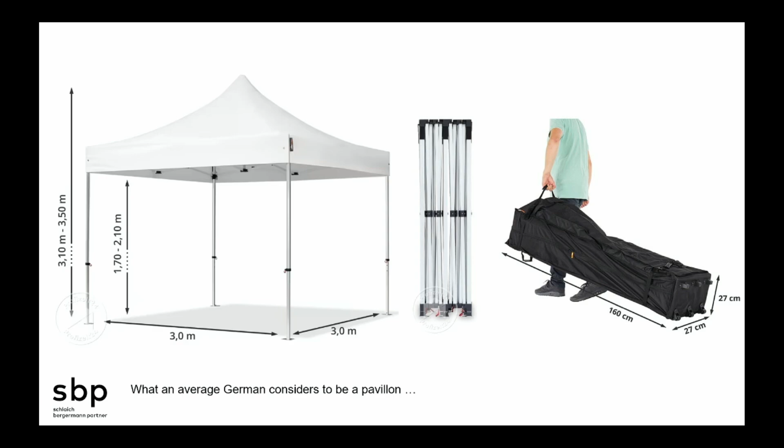And this was the question. I looked up in the internet. This is what the average German says. It's a pavilion. It's a lightweight, tensile structure which you can fold away, and which you can carry. So it's one kind of pavilion, mainly used on beer festivals and other occasions, where to celebrate and sell things. But I think this is not an adequate answer to the pavilion question.

So what can a pavilion be? I looked it up. It can be a small garden building, a summer house, a kiosk, a temporary structure. It can be built for any purpose, for leisure, for shelter. Often it's an annex to a building, sometimes it's on top of a building. It sometimes also resembles a classical temple, but not necessarily. In many cases, it's very small or tiny compared to the surrounding, and sometimes it's also embedded in the landscape, part of a pool area or whatever. So what I learned from this is nearly everything can be called a pavilion, and so it was not too hard to find some pavilions in our work as well.

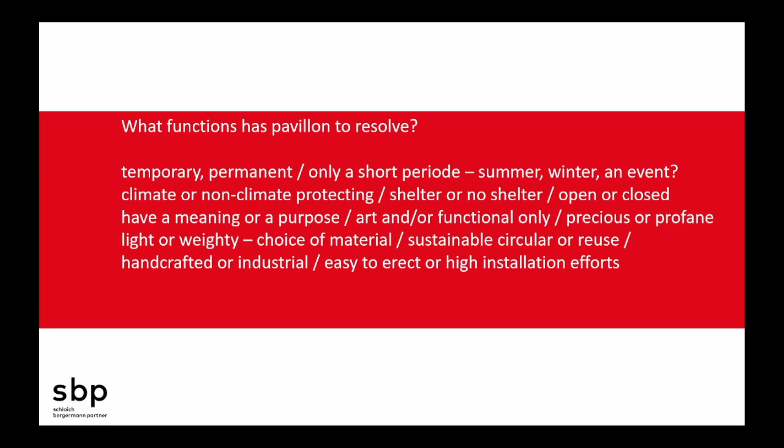So what are the functions of a pavilion? I was asking myself a little bit. It's always the question, as we have seen at the very beginning, is it something very temporary? I use it only for one occasion, for a short period? Do I have to use it in summer, winter, or which climate we have? Do we have to have climate protection in such a pavilion or not? Might it be open or closed, or is it no shelter at all? It's also only something you can walk on. And how does it deal with the landscape itself, which is natural surrounding?

Does it interfere a lot? Is it sustainable? Is it built from sustainable materials? Normally when you can reuse something or often use something, it's sustainable in itself, but also is there something in material? Are they done in a very proper handcrafted way, in an industrial way, or are they done more freestyle? That was quite interesting to find out for me.

And so also the erection, the installation, the detailing is quite nice, what normally engineers really like to talk about. And these are the things I had the feeling I should collect some ideas. But first, I had a look also to the internet. So when you want to get inspiration, I think you at AAC, which are now in the workshop, you need to look for inspiration. And in Germany, there's a big tradition on garden exhibitions. And these garden exhibitions normally display a lot of small and tiny buildings. So the garden exhibitions are a huge fundus to get ideas of pavilions.

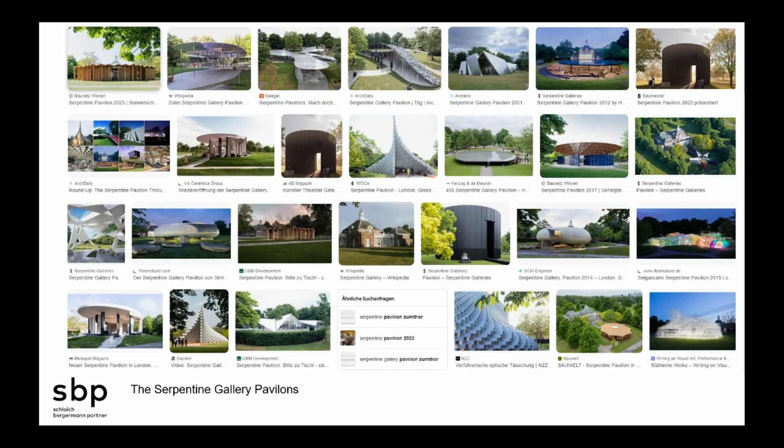And there are many people who know the Serpentine movement. Each year there is a new and nice pavilion, and these are the high-level pavilions which you can find in architecture. Always well-known architects are doing a pavilion each year. This is, I think, the top level where you can get inspiration, because I think there's no lack of money in these pavilions. But what I feel is more interesting is also to look into research.

There's Philippe Block with Block Research Group at ETH Zurich. He does a lot of research in materials, but he applies these materials in smaller pavilions. So the expression of his research is always put to a pavilion. So he rethinks shells, he rethinks concrete slabs, he works with timber and carbon. So this is a kind of inspiration.

But also in Stuttgart, there's Achim Menges and also Jan Knippers, who are working at the University of Stuttgart. And they are working with timber. They are also working with carbon fiber systems. You could say carbon fiber, wow, that's a nice material for tension. They mainly use it as compression member, which I don't really like, but they're doing nice examples. And also the production and the fabrication of these elements is very nicely done, so that we can learn a lot. This is what you can find everywhere you look.

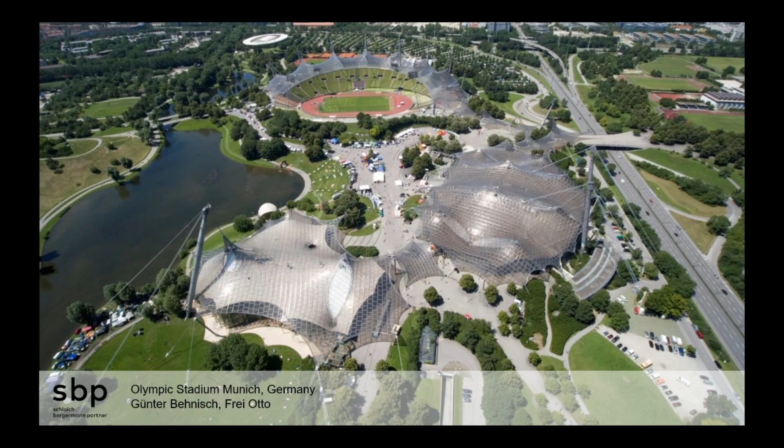So the kind of mother of development in our office of lightweight architecture is the Olympic Stadium in Munich, the tent by Günter Behnisch, which was inspired there by Frei Otto, and Jörg Schlaich and Rudolf Bergermann, who are the founders of the office, worked as the lead engineers in that project. And I would say you could call this a pavilion in a garden as well, because it's a lightweight roof covering a landscape.

So even if it's, and this is the reason why I said it must not be small, for me this is one of the examples of a huge pavilion embedded in a nice landscape. And this is something where I said, okay, there must be more of them.

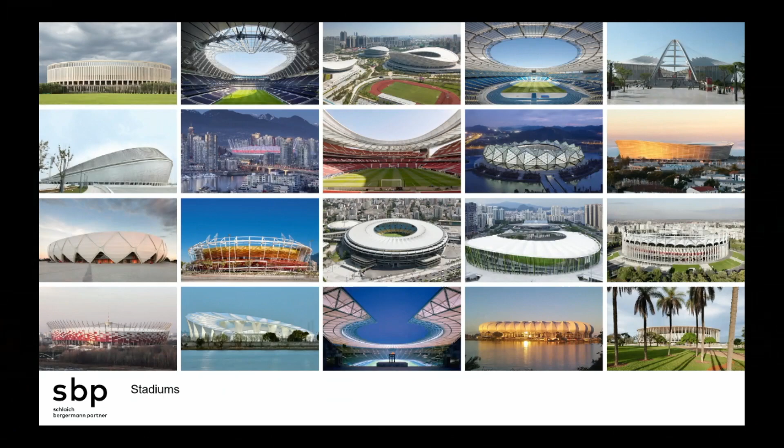So on these kind of structures like stadia, we work worldwide. A lot of projects are together with von Gerkan Marg and Partner. I always take one example of one section. This is Suzhou, which I did with Nico and Magdalene. And also here you can see there are smaller buildings resting on a plinth. Also this can be called maybe a pavilion, but these are sports buildings.

The main interesting thing with us as engineers in this project was, normally we do tensile structures, and there's a very famous principle of the ring cable roof, which we apply to many stadiums worldwide. And then we had this nice undulated shape of the Suzhou roofs, and can we make structural use of that?

And this ended up in a single layered roof, and this is a kind of expression, I think we used this picture during competition, where we explained to the clients, okay, there's a transition from a double layer cable system to a single layer cable system. And this was the challenge at that project, which we had to work on. And in each and every project, we would try to find a new challenge. That's how we like to work.

We do a lot of roof structures, glass, membrane, whatever roof structures. So they're also spread out worldwide. One example is also Suzhou, because it's one of the biggest grid shell roofs in the world. It was done together with Benoy Architects. It's covering more than 35,000 square meters. It's resting on 4 buildings, and it's one single roof wrapping everything together.

But the main interesting thing with these grid shells, which have a long tradition and a long history, which can be found also in Hamburg, the Hamburg Museum, is how to mesh such a roof, how to handle deformations, how to handle, in China especially, the vibrations or the dynamics which derive from the earthquake.

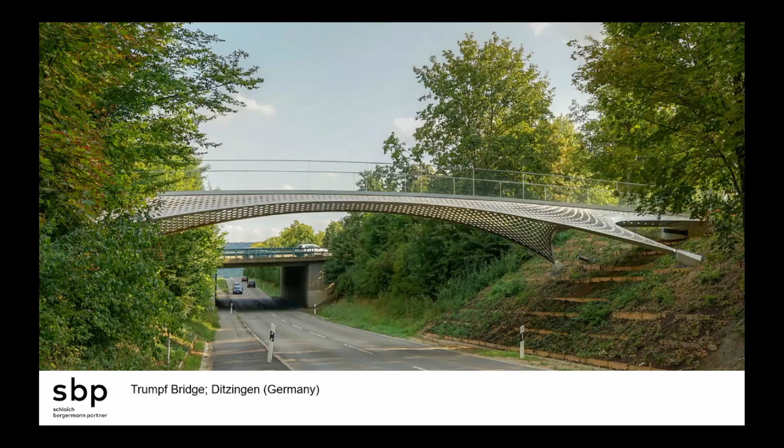We do a lot of footbridges. I have one example. That's a bridge for Trumpf in Stuttgart. It's not a small company, it's a very famous company doing laser technology. And the idea comes from an orange net, which you stretch across an arch. Then you have a tensile structure.

This one is stretched, and when you would freeze that, the word freeze I will come to later on again, you can remove all these stabilizing things, and you have a compression structure. Now it's a tension structure. At the end, it's a compression structure. And also here you can see the white fibers of the net are following the line of the forces. And so you can ideally learn from such a simple model how a structure could work.

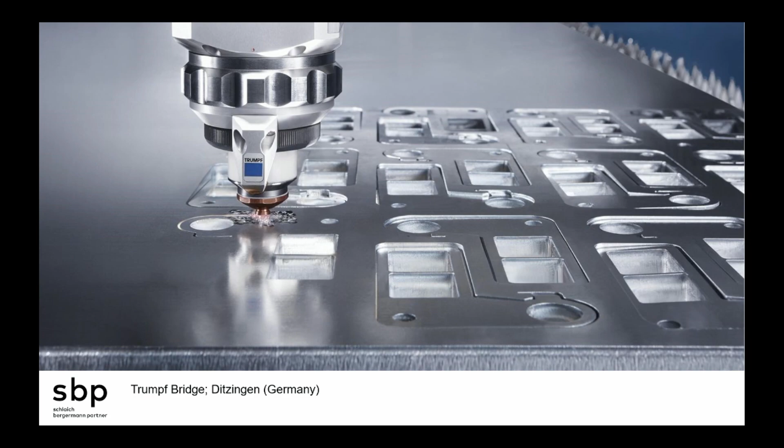And the fun was that Trumpf, as they do laser cutting, well received the idea that the material which is not needed in the structure, following the lines of the forces, we cut away by laser cutting. And this was done in a huge workshop.

And as you can see, it's like the cable net you have seen before. The lines are stretching out where there's no material needed. We cut it away. And the other material parts where there's force and density needed, they are still in place. That's from structural idea to fabrication. This was the idea behind the bridge, what we were interested in.

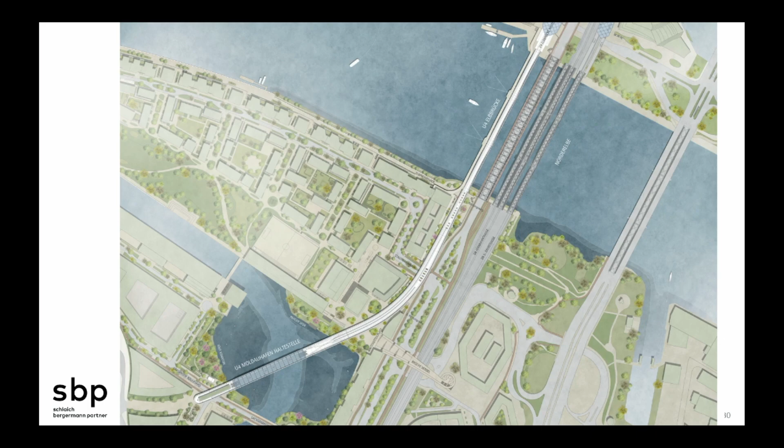We do a lot of big scale bridges, roads, railroads. I brought one example, which is actually the biggest one in Hamburg. We are really proud to do it together with GMP and also with WTM, which are engineers from Hamburg.

That's a crossing of the Elbe, U4. And the very special thing here is there are the historic bridges of Freihafen-Elbbrücke, which are very famous, which are very important to the city of Hamburg. And in front of them, we add a new arch system. And this new arch system is half the height of the old arches, because we apply new technologies and new

materials. The hangers, which are here in the back at the Freihafen-Elbbrücke, you see everything from steel. They're nearly invisible in our new bridges because they're made from carbon, because carbon can take high tension forces. And this allows us to crisscross the cables and to build this not as an arch only, it's a truss as well. And this allows us to bring down the curvature.

And so the explanation was, it's like an onion. You put a next layer of technology, a next layer of development in front of the old bridges. And I think this story was quite nice to explain to the jury, and the jury found it very, very interesting to have these bridges in Hamburg.

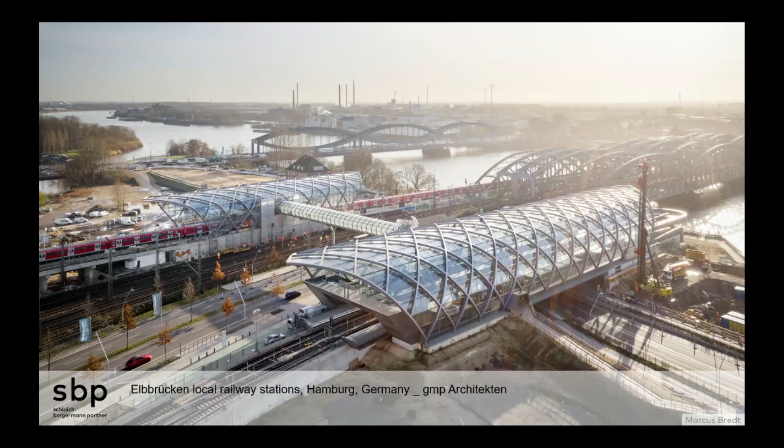There's infrastructure more than this. Also with von Gerkan, Marg and Partners, that's the starting point of these bridges. It's Elbbrücken Haltestelle, so it's a stop of Elbbrücken S- and U-Bahn. And the very remarkable thing is that within the old environment of the steel structure, we found an expression to have a new roof expressing the same kind of thinking, steel as the exposed material, showing how the structure will work. And the tricky thing with this was how to develop the geometry again.

So the geometry of these girders, which are going across the barrel, are kind of curved. And to resolve such geometrical problems, that's something of huge interest to us. So that's from inside. Inside it's smooth because the steel structure, as we can see it from the Freihafen-Elbbrücke, is outside. It's very well visible, but the inner skin is very slick because the glass layer is inside.

We do a lot of long span structures, which we call halls. Many of them are fair and exhibition grounds. So this is something we did, I would say, worldwide at 20, 25, 30 locations together with the colleagues sitting here. And with each of these projects you could say, okay, it's getting boring. No, it's not getting boring because there are always specialities.

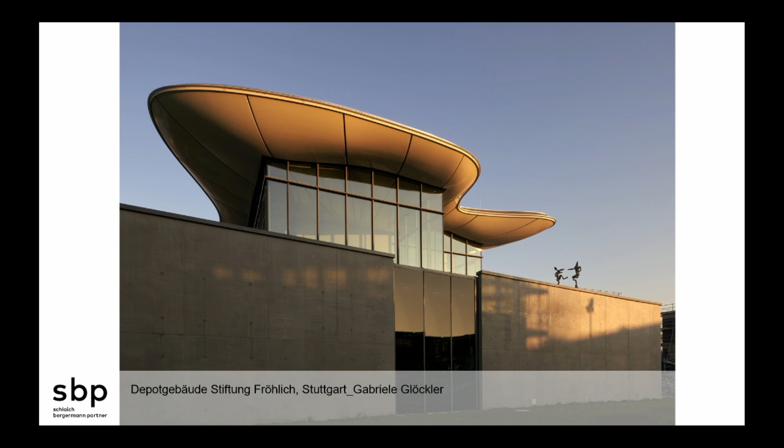We're doing cultural buildings a lot. This is a very, very small example of a museum in Stuttgart. There's a collector, Mr. Fröhlich, and he collects pictures, and he built a depot. That's just a depot. The concrete thing is the most important. What is resting on top, this little pavilion, is just a meeting room for his company, which is located next to it.

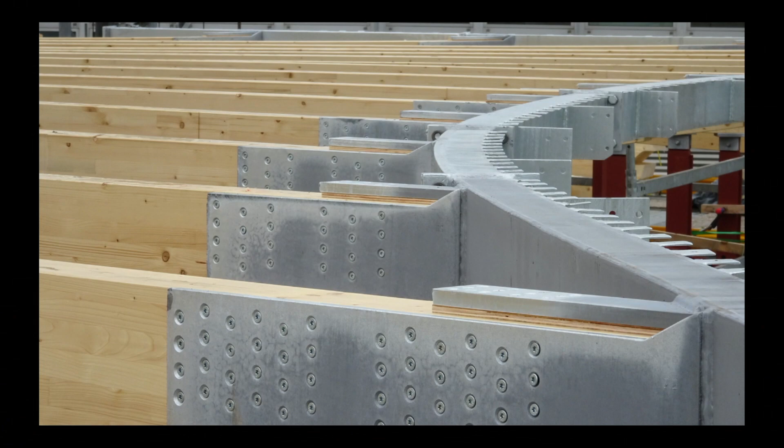The idea was how, and this is what I also like when I work with architects, is sketching. I feel it is very important to sketch and express yourself in the form of a sketch. Today it could also be an electronic or a different kind of drawing. But my expression is sketches, and when you have colleagues where you can sketch together and find out how you can resolve such a curved structure, that's the fun I like, that's the fun I'm attracted by. And the shape is maybe curved, but you have to bring this into a solution which can be solved by the industry.

And these days, when you have curved structures, you mainly combine steel and timber, because the timber you can machine very properly to any shape you want, and this gives you freedom to develop forms. And the steel is in most cases needed. You will see this later on in some more detailed examples, because the timber has its weakness.

And we are used to long spans, we are used to high forces, and we always think what we can solve with steel, we also can solve with timber, and that's not true. So we have to also do the construction or select the materials or react with our construction, with our spans, with our systems on the material we want to use. That's also an important message.

And that is what is inside here. That's a collection, or a part of it, it's only one wall, they have several walls. So this was the nice thing, to have such a nice concrete block and have wonderful pictures inside. I guess you know what all these pictures are. And then there are the large scale projects.

This is the Opera in Shanghai together with Snohetta, where we developed the entire geometry, which derives from a fan, which you would need to cool down a little bit here. And this is a big stair winding up with a cantilever of, let's say, 25 to 27 meters. And this is kind of winding up.

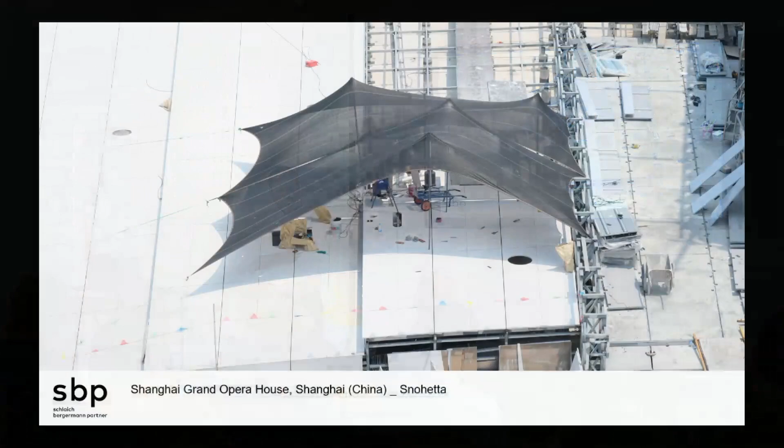And this is what the workers put up for sun shade on the stairs, and I would call this a wonderful pavilion, but this is only a sunshade for the one doing some welding works. But for me this is a pavilion.

We do a lot of art installations together with different artists, I have some with me, or with architects. A simple one, this was in Beijing. It's just a metal plate where you cut lines and then you punch a mast through, and this gives this so-called spiky canopy. With Hou de Sousa from New York, we did some walkable structures, very simple, but from these things you can also learn how to treat color, how to treat minimal, very tiny details and so on. It's also very nice.

Or we work as a university. One of my partners, Mike Schlaich, is professor at the Technical University of Berlin. And there was a huge development, it's called the Great Repair, where we think, I think this is one of the challenges in the next years, that buildings have to be retrofitted or upgraded. And this kind of symposium was about how we can make buildings which are already existing function again for more than the next 50 years.

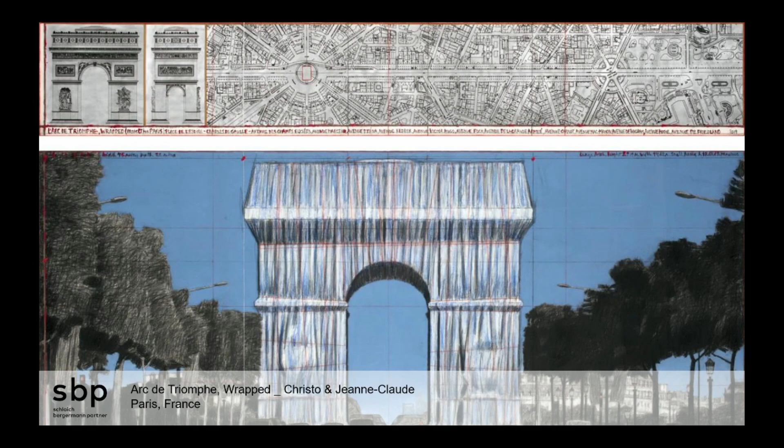And we had the great pleasure to work with Christo and Jeanne-Claude. The latest project we worked on was the Arc de Triomphe. We did all the wrapping of the arc, so all the structural engineering, and you would really wonder how much structural engineering is in such a little package. We could not drill any hole into the arc.

We could not fix anything, so everything was bound around, was stretched, was kind of hung from the top, and finally all the lines which you see here, where the cables or the ropes are running along, they are given by the artist and have to be followed very precisely. So to solve this took us 1.5 years, in order not to harm the building, which is under heritage protection. But it's huge fun, and it's a huge pleasure to do such things.

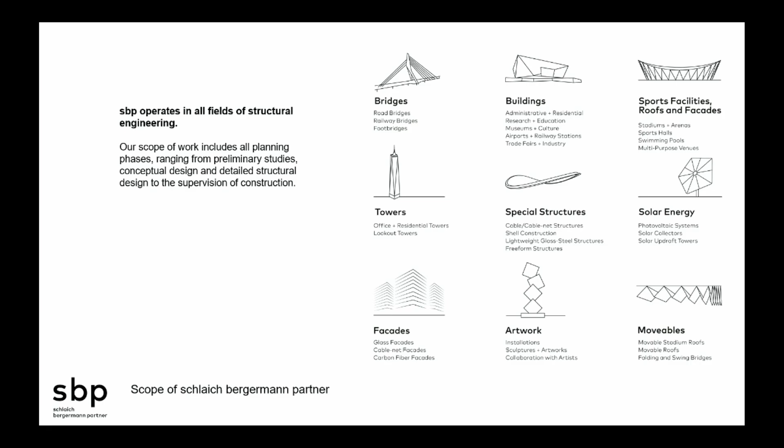So you see, you can look to every field, you find a lot of buildings. And I try to give a bit more detailed insight into more projects. I question myself, what is the importance in a pavilion: design expression, or is it structural logic? Must it be heavy or must it be light? Thin or massive? Can it be concrete, clay, brick, whatever? And you will see at the end, when my conclusion is given, what I think about that.

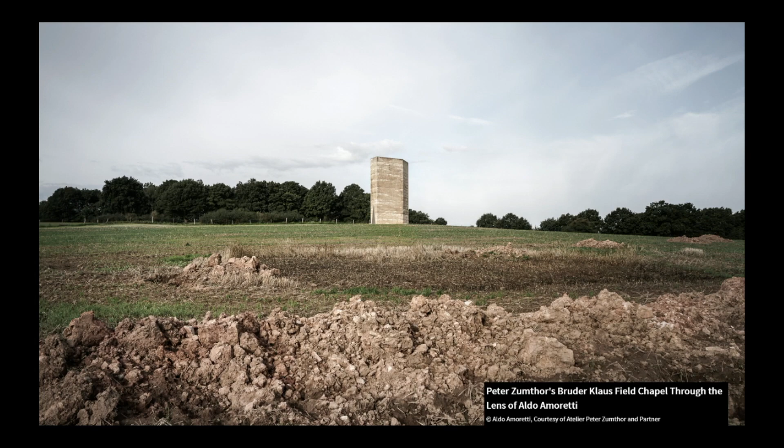And we are more speaking about lightweight. We're coming from the other side, not from heavy concrete, but from lightweight structure. Mike Schlaich at the University in Berlin developed this infralight concrete, which is lighter than water, which swims in water. We developed several buildings from this concrete, which uses clay bubbles inside to make it very light.

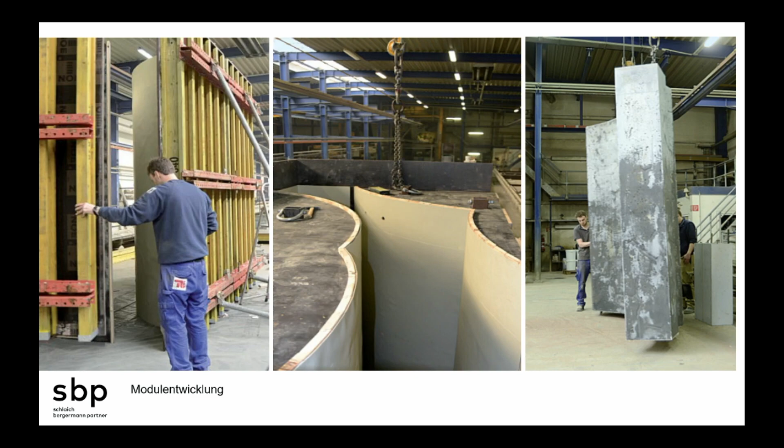This is also a kindergarten in Berlin. It looks like it could be a pavilion or could be used as one. This is cast in place, but because it's so light, you could also do prefabricated elements. If I were talking about a pavilion which should be heavy, I would go for something prefabricated, which you can easily assemble on site and move. When you want a heavy material or heavy-looking material, it could be concrete, but it could also be a light concrete to help fulfill this task.

This is a pavilion or proposal for IBA together with Barkow Leibinger, made from these single elements. It's like ein Kartenhaus, so it's just simple plates with a plate on top. That's a pavilion from concrete.

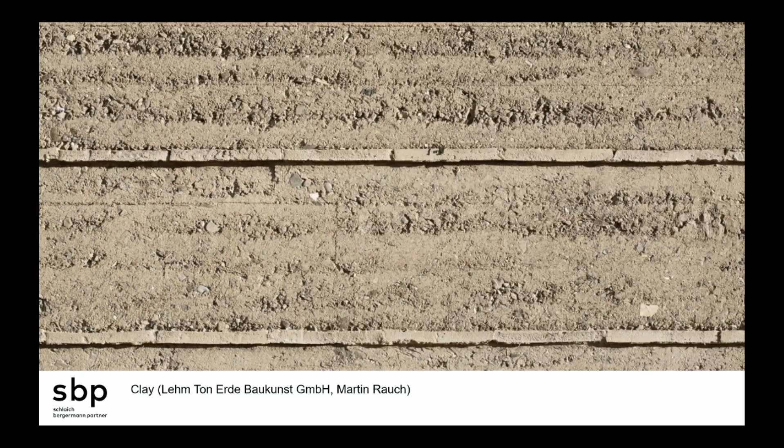There's clay as a material, and there's a very famous guy, Martin Rauch, in Vorarlberg, where I do my vacations next to. It's called Lehm, Ton, Erde, Baukunst, so they're doing a lot of clay buildings. And these clay buildings, you would not expect that.

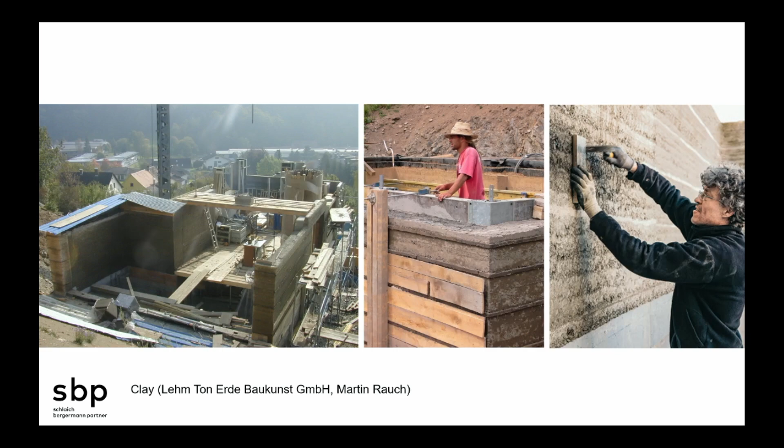The idea behind it from Martin Rauch is normally to take the material from the site you're building and build up your buildings. This is his private house in Schlins, and it's handcrafted, everything is handcrafted. It's good, someone might wonder, that's tricky, always handcrafted. But now they've erected a new fabrication facility, and they do prefabricated elements which you can transport. Actually, many buildings in Germany are built up from these prefabricated clay elements. As a student, you can do an internship at Martin Rauch's workshops, or a summer school. Also something very nice you can do in Vorarlberg besides hiking and everything else.

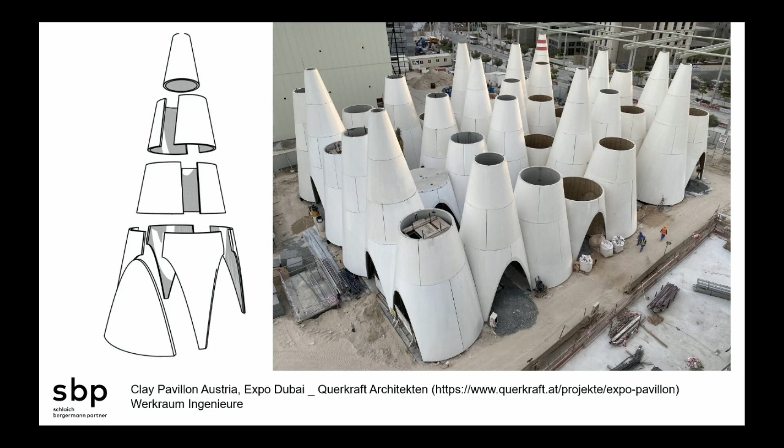Clay is quite nice. There's a nice example from Querkraft Architekten for the Expo in Dubai. As you can see, these are huge cones, and these cones are also from a clay structure, but they are also prefabricated. That's the important thing behind it, because within a short period—our reality in the building industry is this: you don't have 4 years for doing a building. The periods for doing a construction get shorter and shorter. So the solution could only be prefabricated, repetitive elements. Repetitive is also very important in that context.

And this is what they did for this pavilion. The engineers were Werkraum Ingenieure from Austria.

Clay. There's a colleague of Philippe Block at the ETH, and the next step could also be using robots and prefabricated clay cylinders to put together a form. It was fun for me to look into that because I know about Gramazio Kohler, and they do these same shapes with clay, prefabricated clay elements which are laid like bricks by a robot.

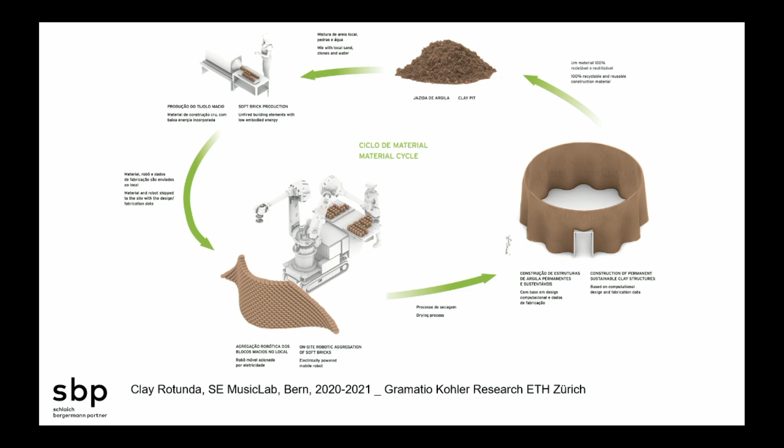So in the ideas behind clay, it's always that you have a building, and this building can go—it can disappear back into nature again. That's the nice idea behind clay, which I think for a pavilion in a landscape could also be a solution.

I normally say heavy, light, hard, and so on. We are more on the lighter side of the structures.

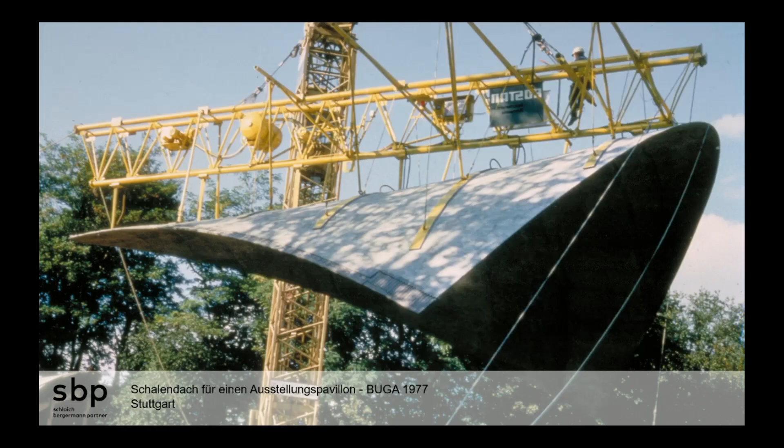This is a very old example of Jörg Schlaich, the pavilion for Buga 1977. It's a shell structure with a thickness of about 1.5 centimeters, a bit more at the end. It's built from repetitive elements, built on one scaffolding, so you can make hundreds of them, which is very useful.

They are built from fiber-reinforced concrete in 1977 — that's what we're talking about these days a lot, and really not managing to do new buildings. This structure rests on little steel balls, so it's extremely light and extremely thought through from the structural flow of forces. Nothing interferes with the flow of forces, so it's really a natural form of force. The foundations are also prefabricated.

This is this famous detail we learned as students, and used it a lot throughout all our work on bridges, everywhere, even for fair and exhibition halls — we use these ball joints. And this you can also do with brickwork.

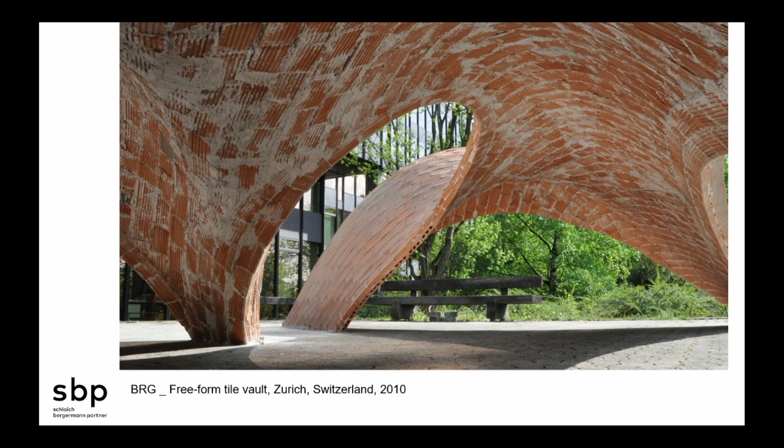That's again Block Research Group. It's also a natural shape, built up from smaller elements, also prefabricated. But what you need here is to bring the single elements in line with the forces and fill the gaps, and you need a formwork — this is the effort behind it. Whereas in the Stuttgart shell there's one formwork and you bring these elements on site and build them together, here you need a full formwork of the entire structure.

All of these, including the Stuttgart shell of '77, have predecessors. One of the famous predecessors of all these shell structures is Felix Candela, and the Xochimilco shell from '58 has a thickness of, let's say, 7 to 8 centimeters. It's cast in place.

It was kind of the example for the Stuttgart shell, and even colleagues of younger age, like Santiago Calatrava, used it for Valencia. So what I want to remind you is, don't only look back 5 or 10 years — sometimes you have to look back 20, 50 years. There have been good ideas, and it's like the wheel of fortune: everything repeats. When you properly look back, you find things that could inspire you, and when you refresh them with new technologies and new ideas, I think this is worth mentioning.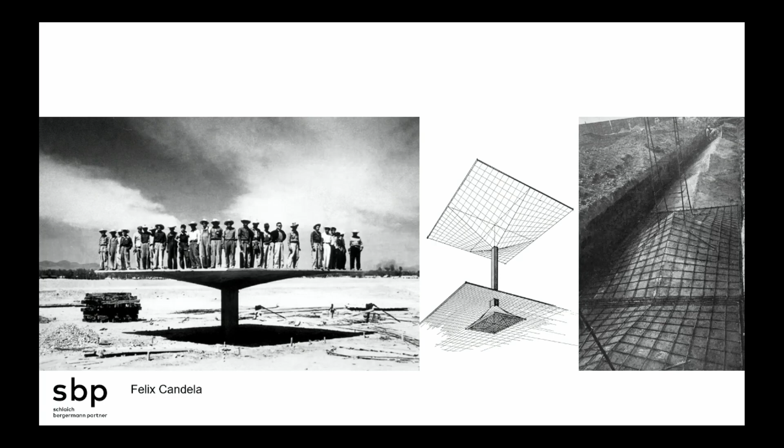Felix Candela we like very much as structural engineers. He did very simple buildings — that's a lightweight roof. But the clever thing is he did the foundation also as a shell, the same shell you see on top. Normally we use 2 by 2 by 1 meter concrete blocks; he only used a 10 centimeter shell as a foundation, doing the same work as a traditional, not well thought-out foundation of these days. This is the reason why looking back could be helpful and a way to learn.

Heinz Isler is another one doing these lightweight structures. This is a stop at an autobahn motorway. For me, it's one of the nicest pavilions you can find among shell structures, and I liked it from the very beginning when I did my studies in structural engineering. He did many industrial buildings, also with repetitive shells.

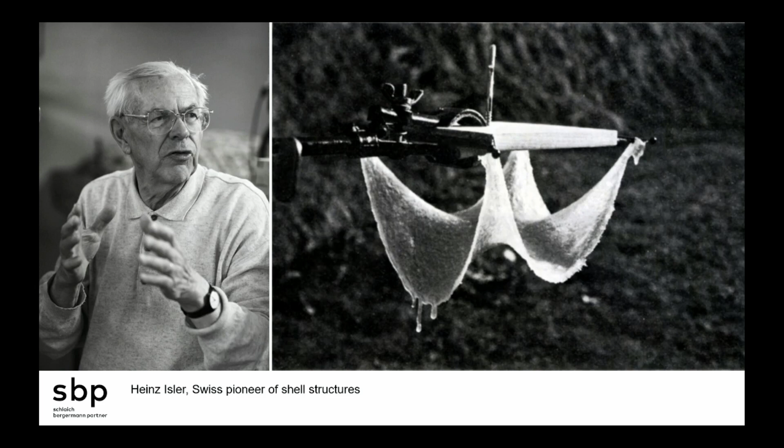That's Heinz Isler, and what impressed me a lot is the idea of form finding, because he's from Switzerland and sometimes it's really cold there. So he just hung some fabric, sprayed it with water, and then flipped it around — the same as with the bridge I showed you before, going from tension into compression. That's a play structural engineers like to talk about.

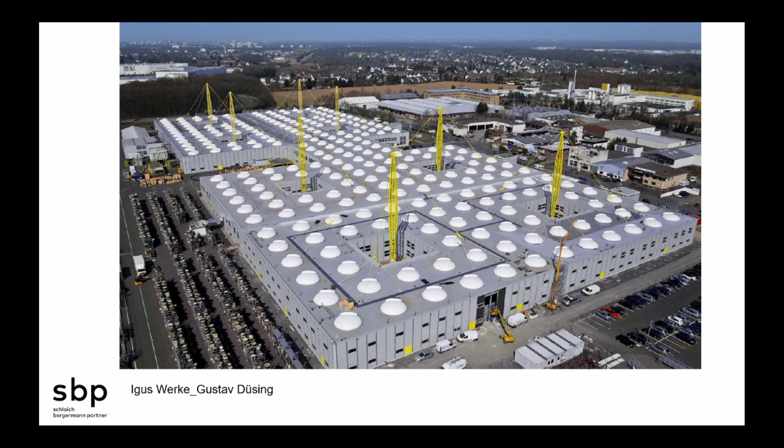It's also not very new — that's Gustav Düsing, who I'd say is one of the very famous young architects in Germany actually. What he does with his frozen tent somehow binds back, for me, to Isler. Gustav was working with us together on Igus Werke, a very famous building for all architects of a certain age. They have courtyards where they take their breaks, which were developed as gardens, and he likes this lightweight fabric architecture.

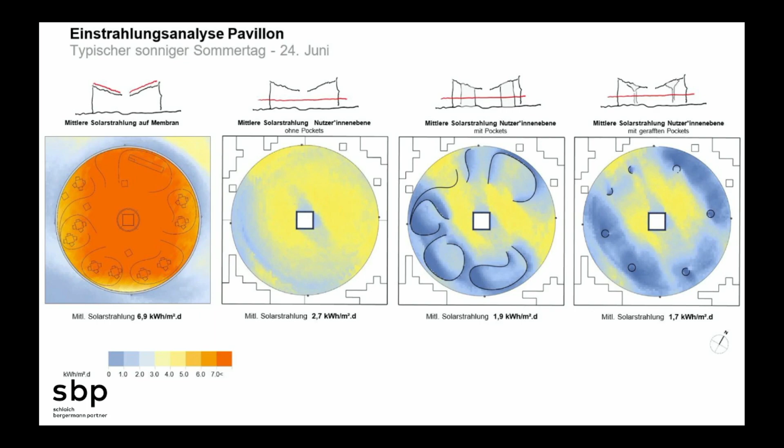We developed together with him a ring system that could be clad with a fabric, and from this ring different kinds of curtains are hanging. This is more an outdoor space, an outdoor pavilion with natural cooling and natural ventilation. The curtains are freely hung from the roof, and with some magnets you could fix them to the ground, so you can create walls. This is the thinking of a lightweight pavilion made from fabric.

They are not load bearing. The other ones, which are frozen, are load bearing, but fabric can be used in different ways. I have a few examples dealing with steel, aluminum, and timber. The question is, do they always have to be three-dimensional? Or are they linear? Are they perfect? Are they imperfect? Are they prefab or made on site?

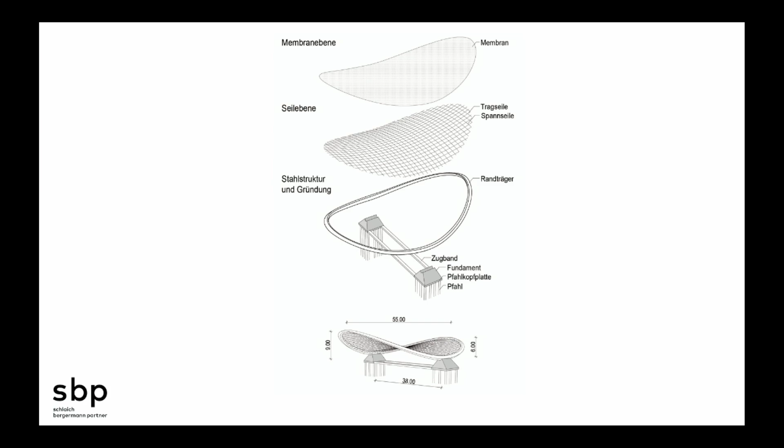So simple, placing a Pringle on the ground. You need a little bit of foundation, but this is a simple element. If you think smaller, you could bring it prefabricated and set it on the ground, laid against each other. That's also useful - there's also a bigger pavilion, from Porsche in Wolfsburg, Autostadt.

Very, very advanced technology - it's a shipbuilding system. Inside you have a structure which gives the shape, and then you have a cladding, like the skin of a ship, made from curved stainless steel. This is the very perfect version of a steel structure. When you look at steel, they need more effort in workshops, more effort in machining. That's the disadvantage or the advantage of steel - you can create more perfect systems. So all these elements are bent in the workshop, and then put together to house the cars.

A very simple pavilion we did for Baselworld, a fair and exhibition ground normally displaying watches, handbags, very luxury things. They're not too happy when there's a non-perfect structure, so they asked for a very perfect structure. This follows something we, as architects at GMP, and we as structural engineers, are always working on - a folded plate principle, which is quite nice, giving three-dimensional shape to simple blocks. These you can dissolve into triangles.

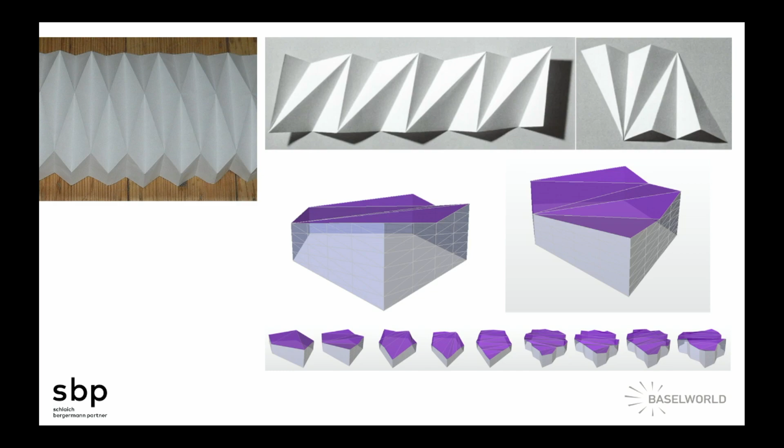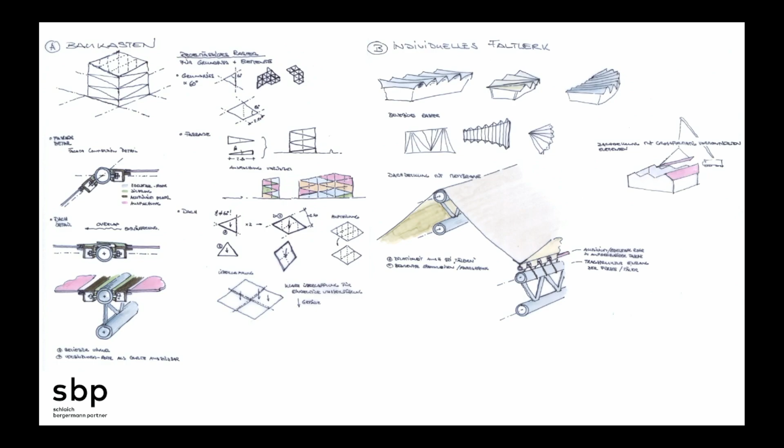These triangles you can elaborate into a set of elements, which are then repetitive - you assemble them, and you can dismantle and reassemble as a pavilion. The most important thing when you think about such a system, which you want to assemble and dismantle again, is how the details are made - there's very early thinking needed on how to handle the detail. The material here is aluminum, because it's light, so people can carry it.

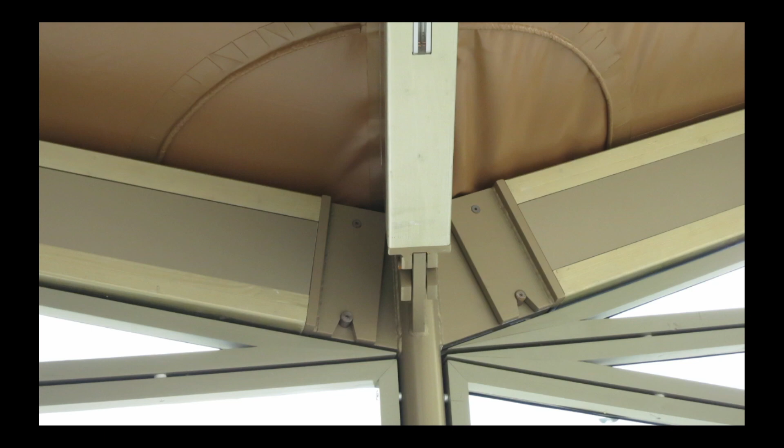Everything has to be machined in a very precise way, Swiss-way machining. Finally, all the detailing you've seen in the sketch has to be developed from the sketch into the drawings, into the machining, and this is the final result. This working - how you hang things together, how you bind things - is the tricky part when you work on these pavilions with linear elements. That's how it looks. The roof cladding is fabric again, which can easily follow that folding.

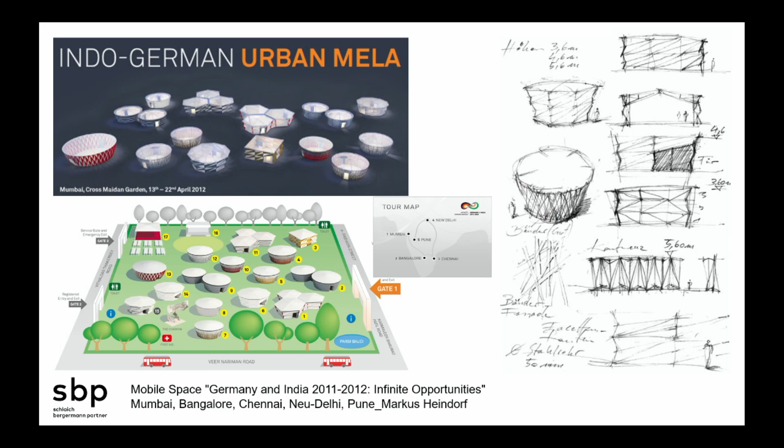Same principle, much more simple - this is Markus Heinsdorf, an artist, and we did mobile spaces together with him. These pavilions were used to display German industry in India at several locations: Mumbai, Bangalore, Chennai, New Delhi, Pune - a lot of places to display. All these pavilions had to be mounted and dismounted several times, and had to be light. This is how it looked, and we have different pavilions developed from very simple tubular sections, with standardized lengths.

They have standardized node points. When the spans get wider, there were sometimes cable suspensions, and also the outer skin was kind of folded, triangularly folded, because the triangle is always giving the stability to a structure. It's not parallel, it's the triangle that gives the stability. And then they were clad by different fabric materials to give the variety of shape, of looks.

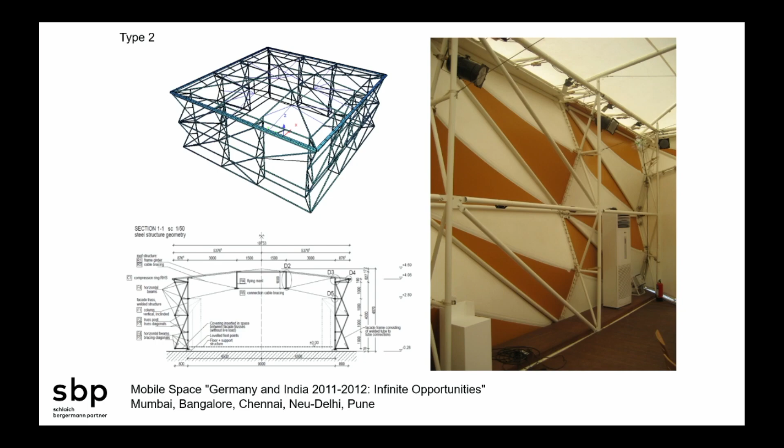So there were round, edgy, combined ones, and they were built up from more or less the same elements, like a set of members. Yeah? And this set of members you could reassemble in infinite opportunities in order to create different kinds of locations.

And also, what is important when you assemble things several times is that parts are easy to erect, that they are not too heavy, and you can have workers from the city where you're doing the erection. So they must not be very much trained. So untrained workers can do this assembly work with this system.

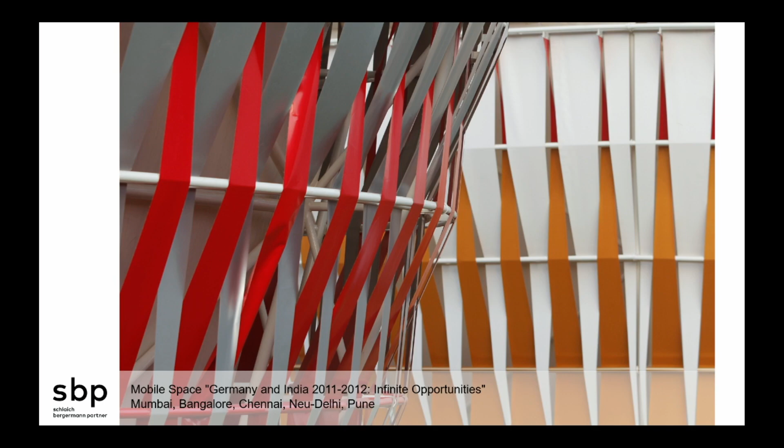And this is just a picture of how Markus Heinsdorf handled the variation. It's just some fabric stripes in some colors, which ends up with some light in a, I would say, beautiful India-like picture. Yeah? Because this colorful image, people liked a lot in India.

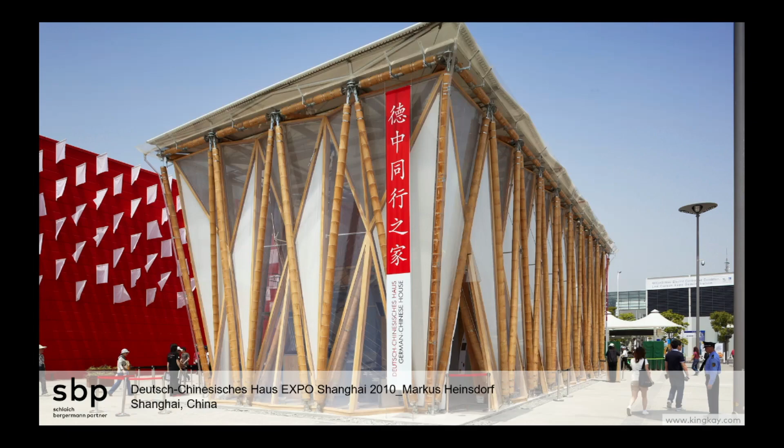This is Markus Heinsdorf, and he also did the Expo Pavilion Deutsch-Chinesisches Haus in Shanghai. And at the end, it's the same principle behind that, but a different material. He normally uses a lot of bamboo, and here he used bamboo as well. That's the picture of Deutsch-Chinesisches Haus, and as you can see, it's quite the same. Single elements, node point, repetitive detailing, which you can bolt together very easily.

Then there's a facade which is independent from the structure, which was lying in the back, and an independent roof structure, which is resting on the structure. So this was the build-up. There was an inner platform also from timber, an outer structure, and that's the main point. And everywhere you can see the triangles for the stabilization. And there's an inner framework, which is kind of wrapped by the glass or by the fabric. That's from the side. Quite easy build-up structure.

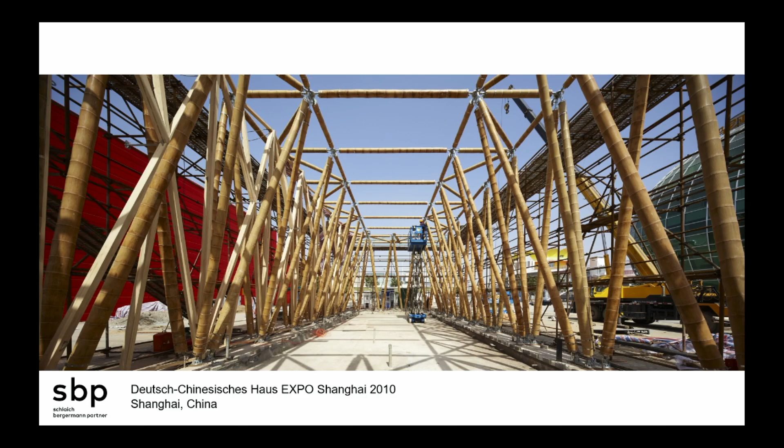Very simple, but also the detailing is very tricky. Bamboo, you know, it's a tube. Not each and every bamboo grain is the same. So you have to look at each of them. You have to machine them. You have to adjust the lengths. Everything you insert, it's hard to fix. So there were slots cut, things put in, and there were kind of rings wrapped around to stretch them.

And all the detailing has to be done in proper steel work. So that's the tricky thing, how to connect, because timber always needs steel for the connections. And here it was done by inserting a steel part and then wrapping and stressing these ribbons on the outside. So all the details can be adjusted on site, because none of the members has the same length, because they're natural. And so it's quite a nice pavilion, but with a lot of effort.

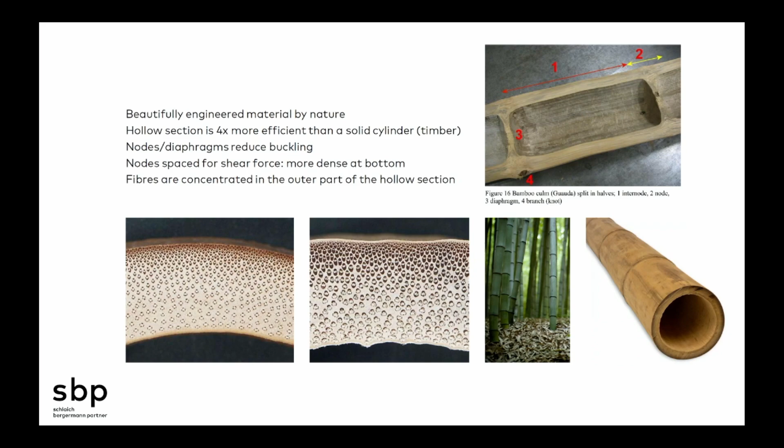And one thing I want to mention is bamboo is a really wonderful material, because it's structurally really nicely built up as a tube, and it has also these node points with the diaphragm, which stabilize the tube so that the outer tube can be very thin. It's still a natural material, but it has a really high strength. It's 4 times that of the boreal timbers we have here, and it's growing very, very fast. So that's also an advantage in making use of it.

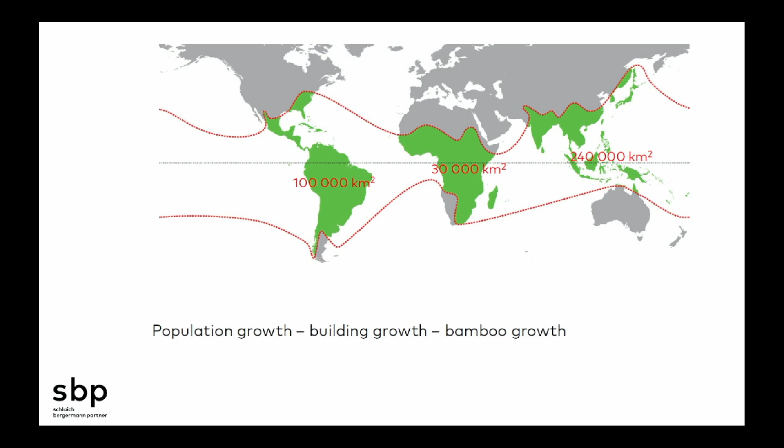But also the treatment of the timber, when you don't want to see these knuckles and all these things, needs a lot of craftsmanship. And what we have to say as well, there's a certain area where bamboo is growing, and it absolutely makes no sense to transport bamboo around the world, for example, to Germany. As well, it makes no sense to transport timber from Canada or from Europe to China. So the message should be: use materials which are from the location, which are growing there, or which are traditional there.

For example, when you want to make solid beams from bamboo, which they also do, you have to split all these bamboo elements into small slats and glue them together, or you even use a bamboo fiber, because otherwise you don't achieve the kind of shapes we are used to.

And Markus Heinsdorf, he used the bamboo as it is. But a construction industry would like to use it this way, and this is a lot of effort. And I think this effort makes sense in countries where bamboo is growing. This is the area where we have the boreal forests, where the timber we are using is coming from. And so everything in the northern hemisphere, I would say, should mainly not use bamboo for construction elements.

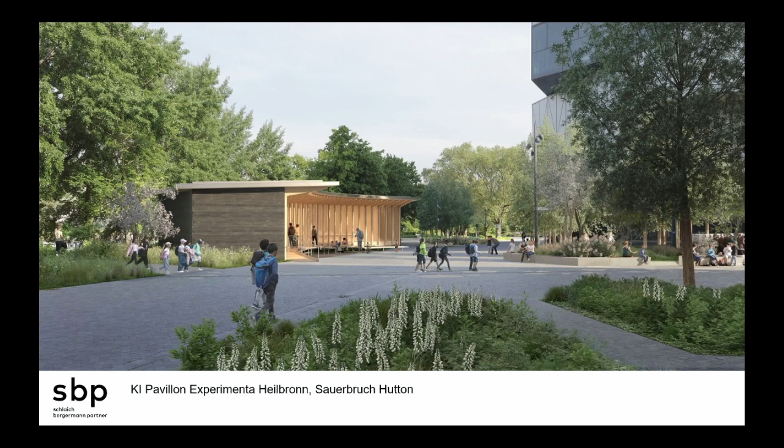This is a pavilion in Heilbronn, a smaller one with Sauerbruch-Hutton, full timber structure following these principles, only plates. So the idea was having a very simple pavilion, but there were some problems on site. There's a kind of a plaza. They wanted to orientate it, so it was bent. Then there were nice lookouts, there's a river in the back. They wanted to have nice lookouts, so they cut away some of the elements. And there were additional trees, and so they shaped the form according to the existing trees.

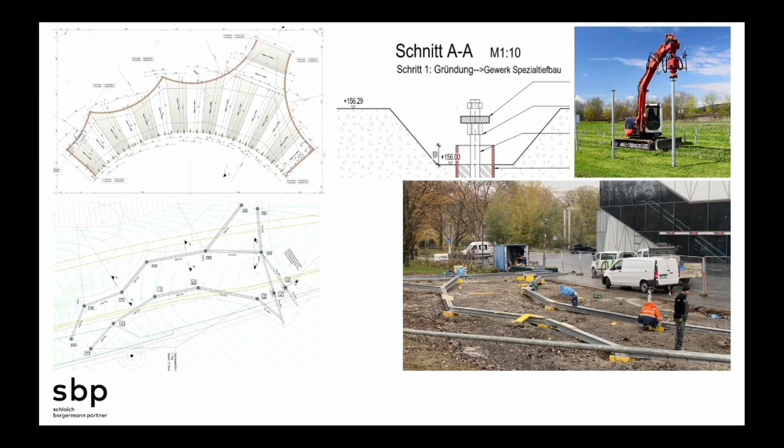But as I said before, timber is quite easy to handle. You can adjust timber to any form. So this is the shape, and since these pavilions often are temporary, you have to think about the foundations, or how they are resting on ground. And here there's a simple system of steel elements which are put on really, really small piles. The steel can be taken away. Also, the piles could be taken away. But this is the least interference you can achieve with the ground. And this is also something you should think about when you embed a building in nature, how you handle the ground you build on.

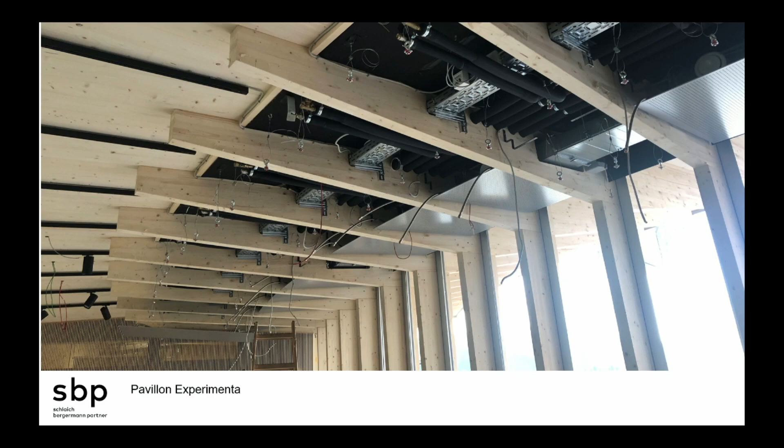Here, it's a very simple way. The elements are also very simple. Vertical members, horizontal beams cantilevering out back and forth, and a very thick timber plate on top. That's it. So timber is quite easy to use. It's a useful material when we talk about smaller buildings, smaller spans, so the span should be very small. That's also fulfilling the needs we have these days of installation, so it's a climatized area. There's a lot of technique embedded in the structure, and this is closer to what we are used to as a construction than in other cases.

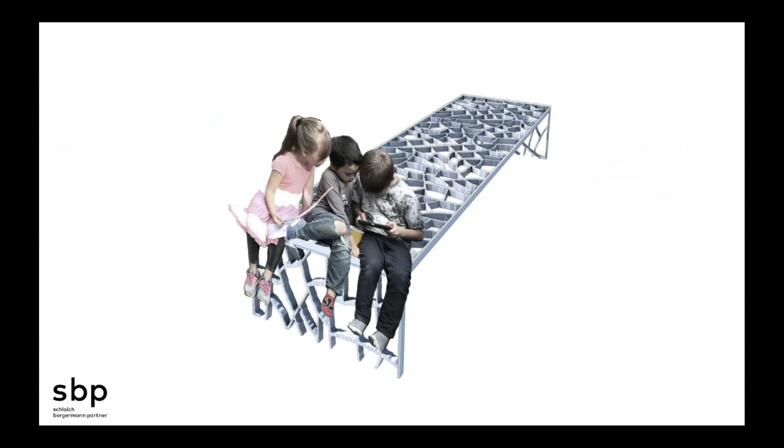I brought you an example on reuse. These are things we see each day, the cans, beer can or whatever, Coca-Cola can. And our colleagues in the New York office did a very nice project. It's called City of Dreams, together with Hofstra University and with Grimshaw Architects. And they had the idea to build pavilions in the park in New York. And afterwards, the elements used for the pavilions can be reused, for example, as benches in a park. And they are made from the debris of the city, the timber, because New York is full of timber buildings. You would not expect how much timber is built in New York.

And the cans used in the city. You would build a shuttering, and this would be filled with the debris, clay or whatever, dirt, and this dirt has to be muddy at the moment you fill it in, and when it dries it gets cracks. And into these cracks, you melt the aluminum and pour the liquid aluminum, and this creates the elements for the pavilion. This was the story.

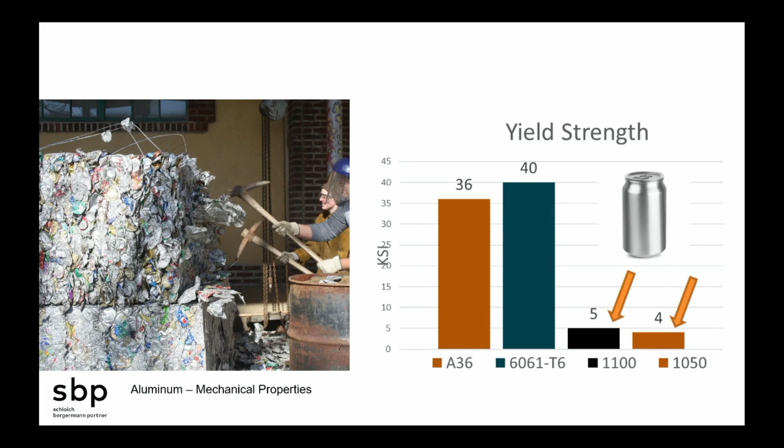This is how the aluminum came to the melting site. So they are pressed and they have to be melted, which is quite tough. Structural aluminum has 10 times the strength of aluminum cans, what they found out. So it was tricky to get a structural behavior out of that material. It was really tricky to bring the mud into shape and to make it crack in a way that is regular and controllable, but they managed to, and then they poured the aluminum in, and this is how the results look.

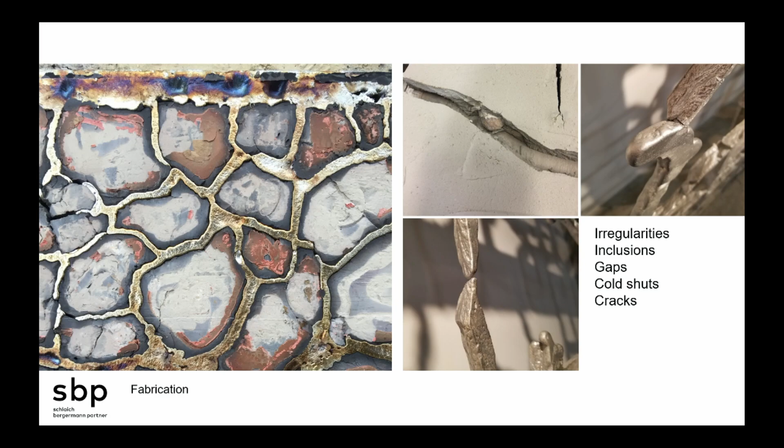It's a beautiful picture, but when you look close, you have a lot of areas where you have cracks, where you have dirt embedded and so on. So it's not a regular structural material. It's a nice idea. It worked out, yeah. But instead of having this as the structural elements, we had to decide to build frames and attach this as a kind of a facade.

So it should show that not each and every idea can develop in a first go to a perfect result. But it's worth trying out such ideas in order to explore new possibilities and also to contribute to this discussion with a practical solution of sustainability.

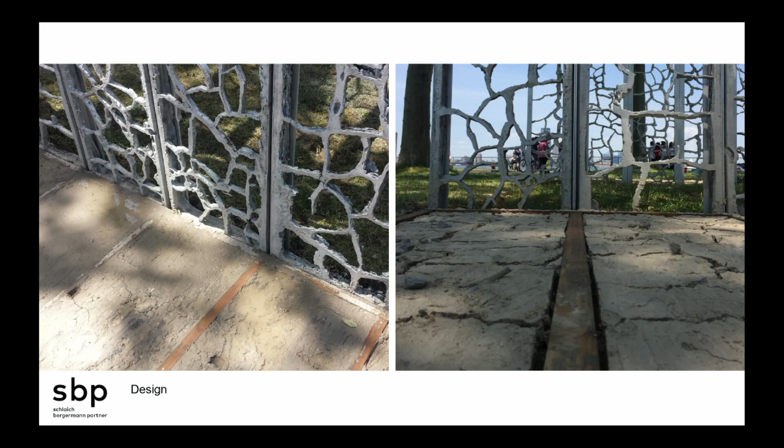This is how it looks when it's assembled. I could not imagine using that as a bench, because when you have meshes that wide, you could not place your back on it. But it's a very impressive way of working, and because it's done by the engineers, the students, and the architects together, really on site, there's a lot of learning behind it. And also building up a pavilion on your own, you learn a lot. This is how it looks.

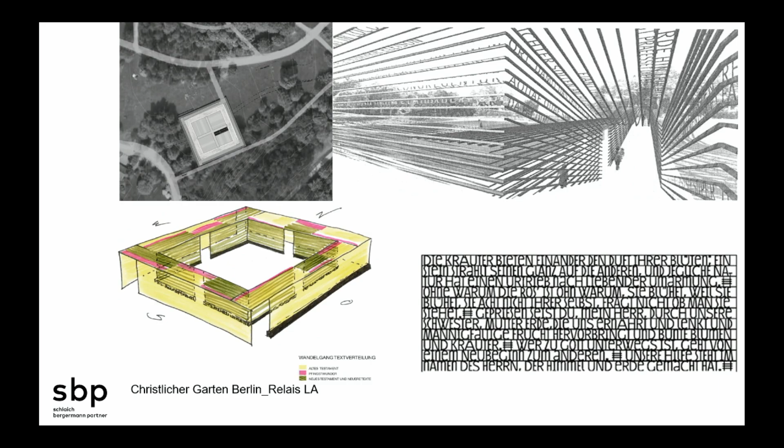The more perfect version of that was done a few years before in Marzahn, Berlin, Christlicher Garten, by Relais Landschaftsarchitekten. It's like a cloister in a monastery, you walk around, and the main point was that there were texts embedded in this cloister, and this was also cast aluminum. It was Old and New Testament and also Psalms, with text from that written on it. So it's a place of contemplation.

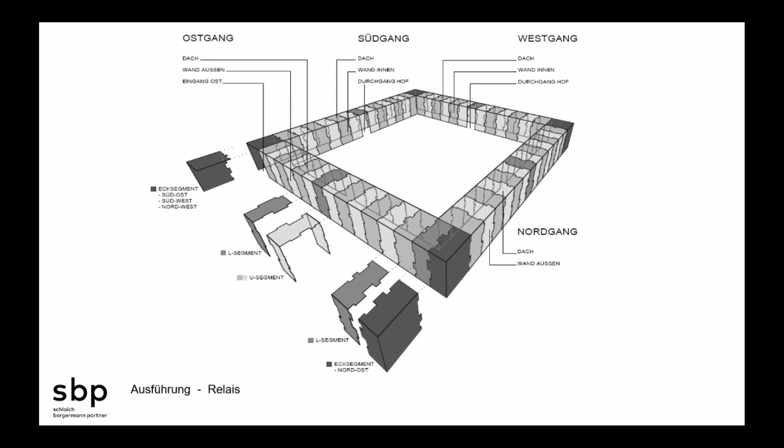The size is quite small. It's 3 meters by 4 meters, this cloister. So this is structurally easy to handle when you have a proper material, which you handle properly, and not using it from cans, which you have to remelt. It's developed like a puzzle system. You have these different systems, and they build up geometrically the entire cloister. But the text is running across from one element to the other, and that's the tricky thing with it.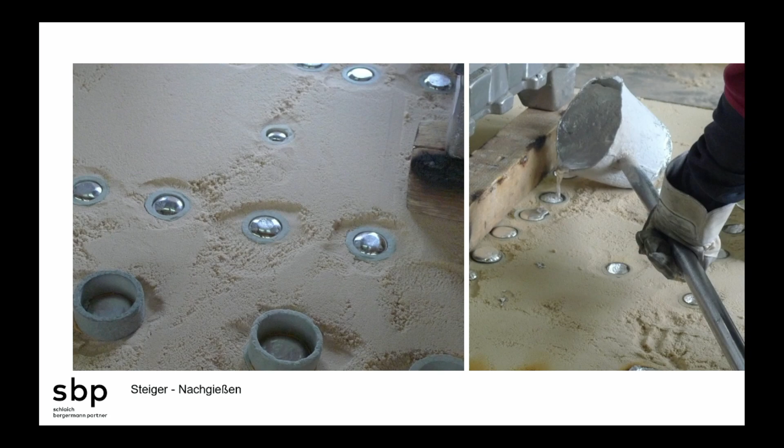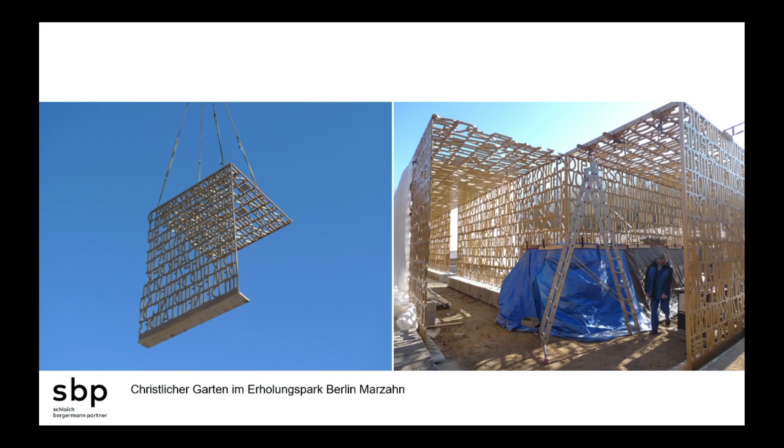But the process of how it is done is quite nice. They build up the positive forms from prefabricated elements, and then they put it in the sand form and cast it. This process was the main idea. What came out then was machined and polished. So very different from the example I showed you before, and this only allows for aluminum. It was brought to site and assembled element-wise, and I think it's a beautiful example of a non-regular structure, a very simple one. It's only 15 millimeters, 30 millimeters thick.

It's structurally working, but the story and the meaning behind it are very important. And I think it's a place where it pays off to go there and look at it.

This one is what I mentioned before, Christo. He has worked on these barrel things since '58, and these mastabas, these stacks of barrels, were always in the mind of Jeanne-Claude and Christo. The big idea they had was the mastaba somewhere in the desert, in Saudi, wherever, with a huge size. The length of this is 320 meters, the height is 160, and we had the pleasure to do the structural engineering for that.

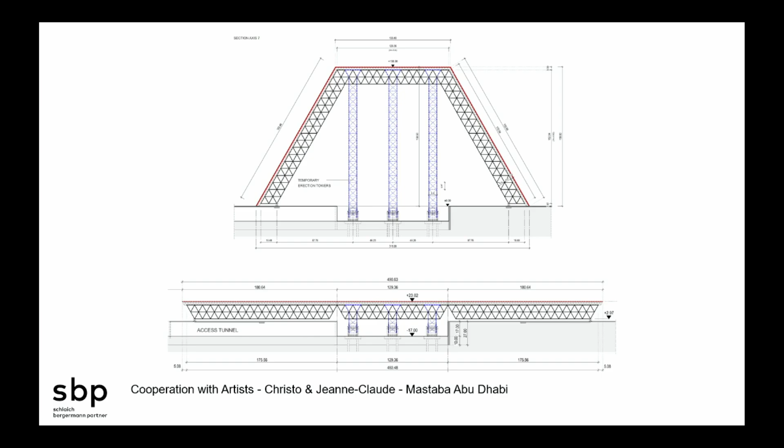It's not built. The structural solutions are there, and as you can see, it's a huge building: 240 by 320 by 160. And because Christo and Jeanne-Claude financed all their projects themselves, they need to make the money for that first. So they did a lot of smaller versions of that, sold a lot of pictures, did a lot of exhibitions. And here a smaller one, the one in Hyde Park for the Serpentine. He did one of that.

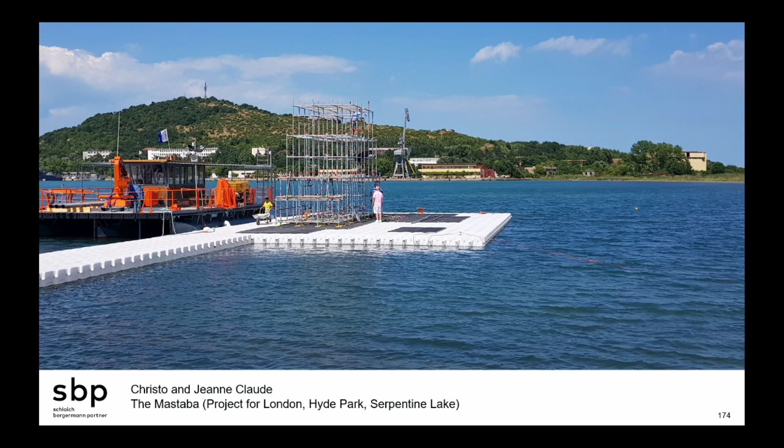We had the pleasure to do the structural engineering. So it's swimming on the Serpentine Lake. It's a small version of the huge mastaba, should more or less look the same. These elements you know also from the other artworks of Christo. These are these plastic cubes which float.

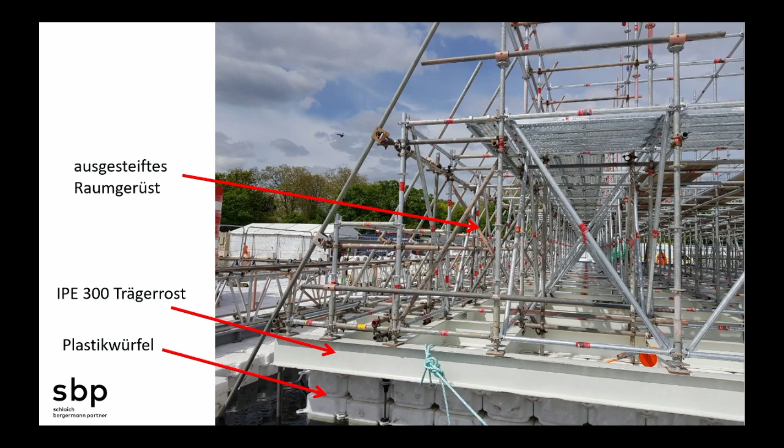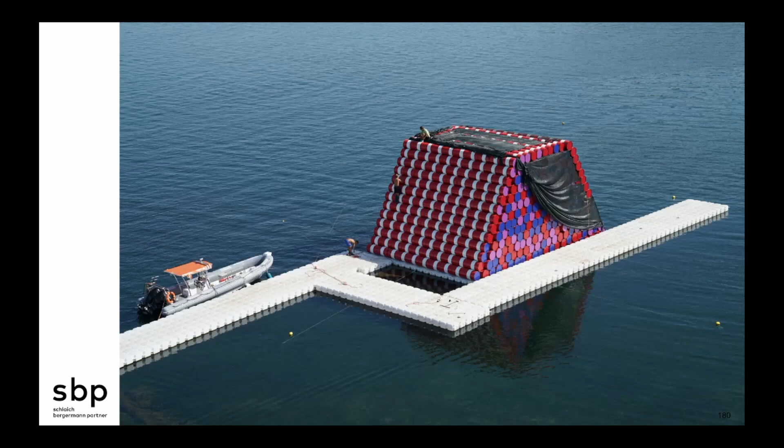And hopefully the ones who now are in charge of the work of Christo and Jeanne-Claude manage to build the big mastaba, or get the funding for the big mastaba. This would be a pleasure to do this in the future.

I did not talk about glass. Many of our projects are about glass, and so I want to conclude with glass. Glass, you can have as we all know from the windows, but you can have glass molded, you can have glass poured or glass cast, or machined glass. There's many variations of glass you can have, and I have two examples brought with me.

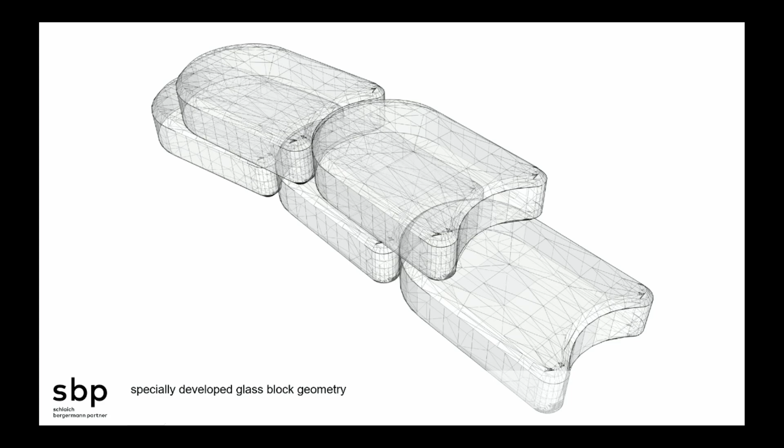This one is the pavilion for the victims of the attack of 11th of March 2004 in Madrid, where this is a glass cylinder with an inside membrane. There's some writing on it, which is giving the condolences to all the people who were harmed, and the outside walls are built up from glass bricks, and these glass bricks are specially developed. They're of this size, like 300, 200 by 70, and have this special shape in order to form an irregular surface and get a smooth outer skin.

This is melted glass, filled in a form, then they have to be pressed. So the energy consumption of such a glass element, you can imagine, is high. And then they are heat treated, because they should not get cracks when they get cold. And at the end, they have to be cooled. And finally, they are just built up like a brick wall. And the glue in between was hardened by UV light. Like you know maybe from the dentist, they sometimes use a UV light, and this hardens the plastic which is filled in your teeth. And that's more or less the same what they used here.

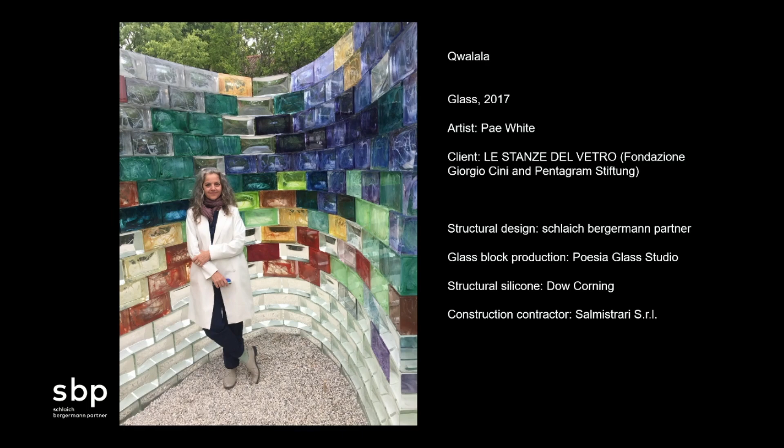And a final project which we like very much is from Pae White. It's Qwalala. It was built in Venice by a foundation which basically deals with glass. And all who know Venice know that there's a big glassmaker tradition. And Pae White is playing with this. Qwalala was the idea of a river, I think in her hometown in the US, and this river meanders through the landscape, and during different daytimes, during different seasons, there's different light, and she wants to reflect that in her artwork.

This is how it looks like. It's built in a garden on the opposite island of the Venice center. It should be a walkable structure, just a wall where you can walk along. There are doors in between. The surrounding is also very natural, and the color was very important. The structural engineering is quite simple because you have heavy glass blocks. You can erect a wall. Since it's curved, it's no problem with structural engineering. It's always stable. The blocks are 300 and something long, 120 by 120.

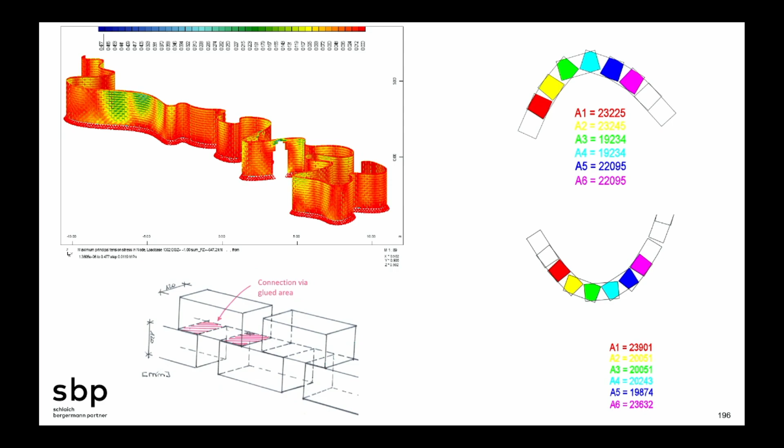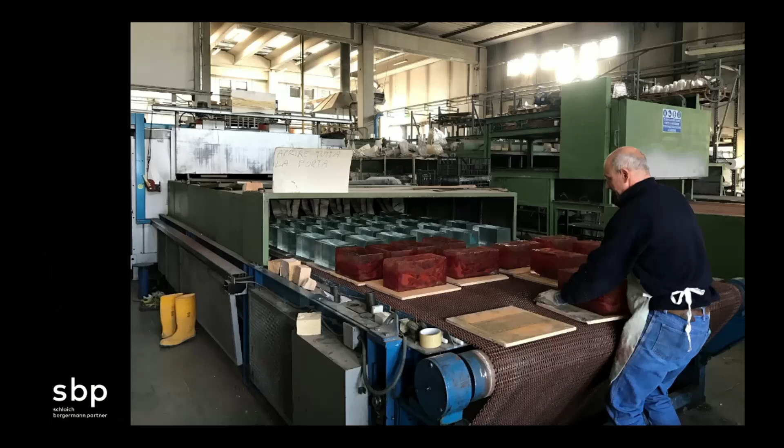Some of them had to be cut, and this was the variety of glass blocks they did. Pae White, P-A-E, White. So then we had to do a planning how to build that up. Well, how is the foundation? Because it's really, really heavy. You have to bring it on ground.

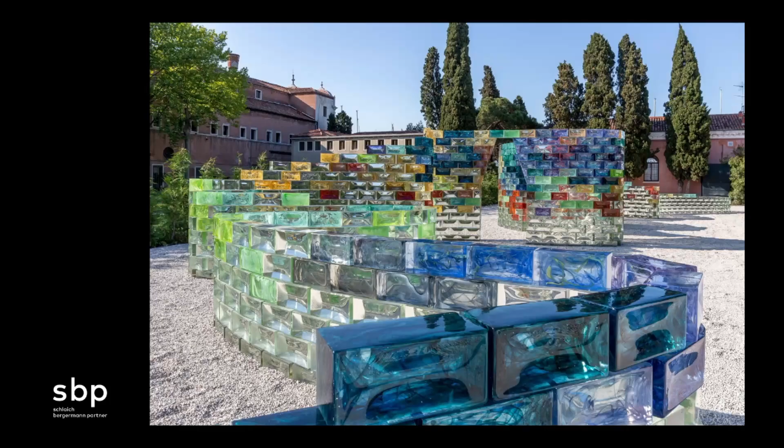So there are clear glass blocks, and they have not this shape. They still have these gaps. It's a temporary work. This is how they brought them up. It's nothing else than doing brickwork. This is when you look along. There are some doors in.

Very colorful. When you cut these glasses by machine, this is the pattern you see inside. And so when you have light together with this artwork, this is the nice thing at this point. It's not about structure. It's about color. It's glass. It's fun. So this is also nice for a structural engineer, even though there's no big structure in it.

So what to take away? For my feeling, there's no limits in size of pavilion. You can use any material you can imagine. You should a little bit think about, is it sustainable? Is it from the location? How to handle it?

Structural concepts, you can either give them a real structural concept like you see from the shells, or from Zumthor, you see there's no need for a structural concept. Both is possible. You have to be really clear about the efforts, what you have to spend in order to erect such a thing. That's something you always have to have in mind. What are the efforts to do this pavilion I'm designing? And you should a little bit think about the sustainability.

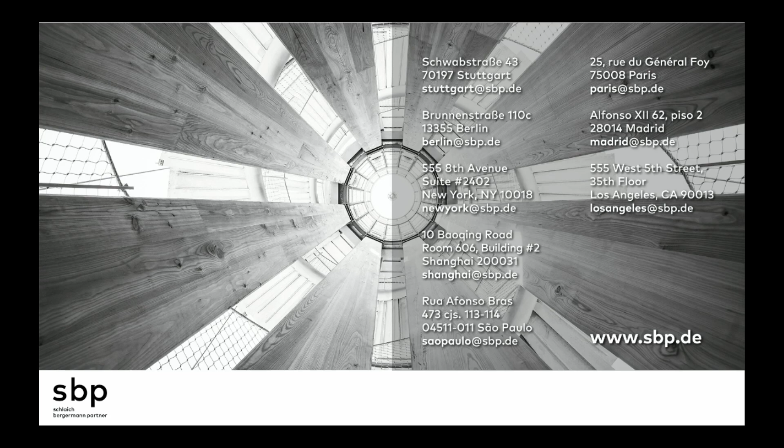I like to add, thank you, but I'm not a lecturer. I'm a practical engineer. I love working together with colleagues and love to sketch down solutions and find solutions for problems or challenges, normally we would say challenges. And there's not much philosophy behind. It's just taken from our work.

And I find within the combination with others, this is the story. You cannot build a story on your own. The story is always built together with others, which contribute to your work. And so we are contributing to an artist's work, to an architect's work, and only when this process is well done, then we have nice results. It's not a standalone solution, what we develop normally.

Thank you very much, and thank you very much for being here so early in the process of the workshop, so we can do exactly what you just said.